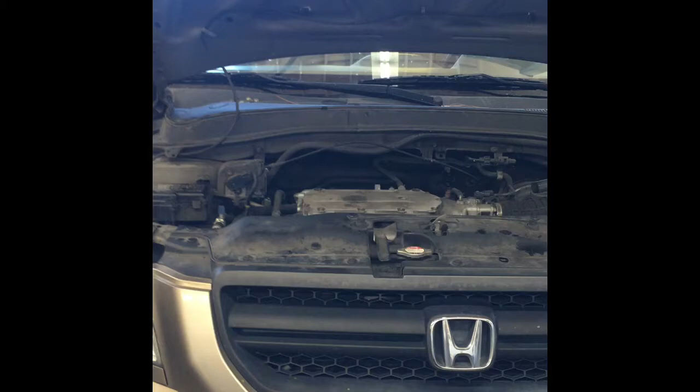2005 Honda Pilot. Valves need to be adjusted. I'm Brian Eslick from How To Automotive, and I'm going to walk you through that process.

To get started, we're just going to remove our upper engine cover. You may notice in the video that a few things are disconnected, but that's because I'm doing a previous repair, so I'll tell you step by step what you need to do.

After you get the engine cover off, go ahead and take the air box and inlet tube off. Unbolt it here, remove the screws holding that on, then there's a squeeze clamp, pull the hose out and set it aside. We need to get this upper plenum off so we can get to the valve covers and remove them.

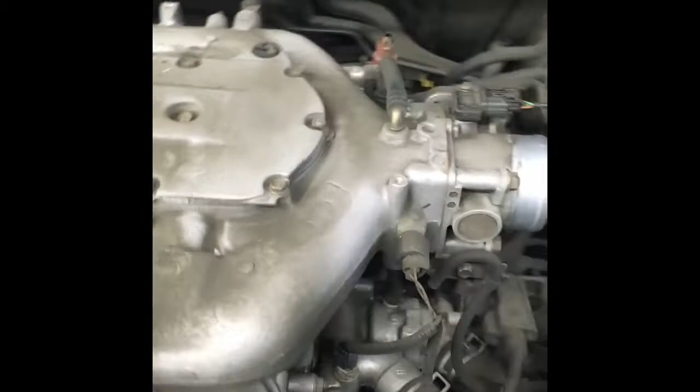What I like to do is take the throttle body off. I'll take off the four bolts holding the throttle body on, and I'll leave as many of the hoses and electrical connectors connected as I can, then just slide it off and set it aside.

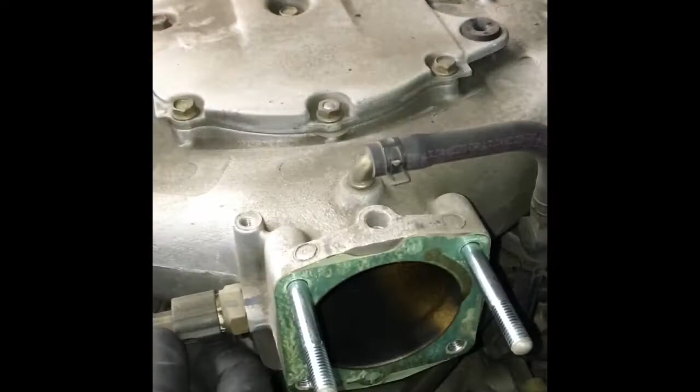Now that you've got your throttle body tucked aside, go ahead and disconnect your temp sensor. Take the two 10mm bolts out on the purge valve and unhook the hose there; you don't even need to unplug the electrical connector, just let it hang down. Take off your vacuum booster line, and on the opposite side of the plenum, take this hose off at the bottom and leave it hooked up on the top.

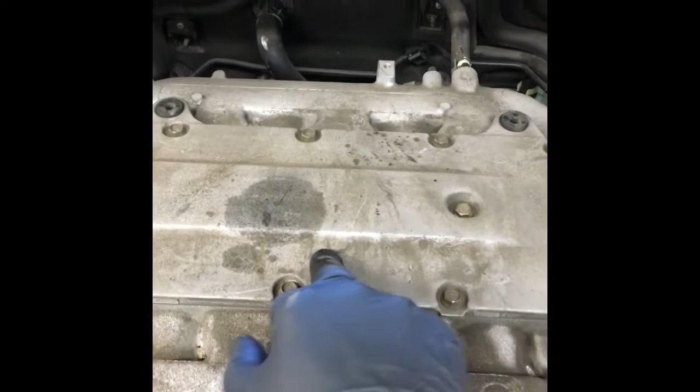Now that you've got all that unplugged and disconnected, take out the 12 bolts and a couple of nuts on this top cover, and take the top cover off.

Now take out the 7 bolts and 2 nuts that are here. Don't take out the 2 10mm bolts here, leave those alone. After removing the bolts, you can just lift the plenum off and set it aside.

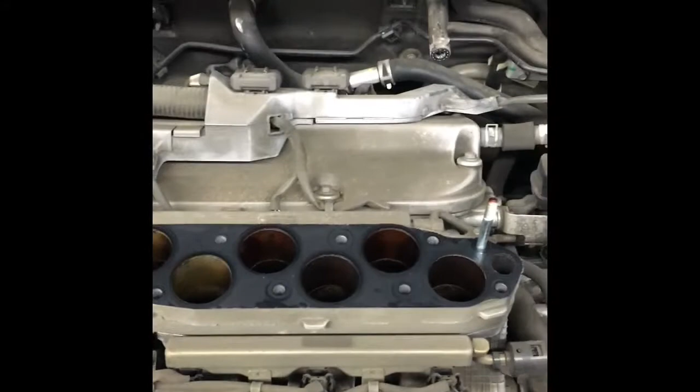Right now I'm just going to leave it on, but what I'm going to do is take rags and stuff them in here to cover all the ports, so that while we're working on the rest of the job, that helps prevent anything from falling in there and causing a future problem. Go ahead and do that.

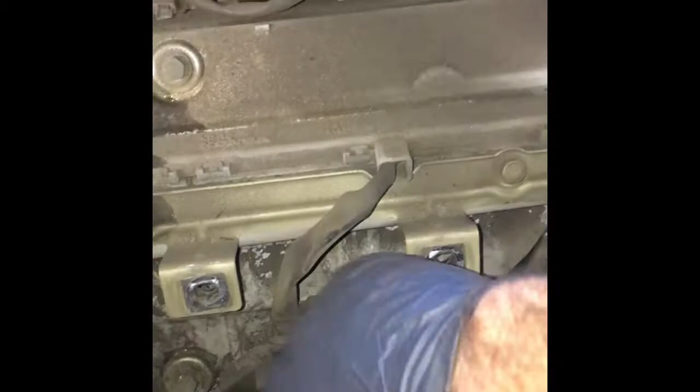Then unplug the ignition coils, take the Allen bolts out, and take the coils out on the front and back valve covers. Go ahead and do that.

Also go ahead and take out the 10mm bolts that hold the bracket for the wire loom down to the top of the valve cover, and remove that. There's going to be a couple of those on the back valve cover too. What I like to do is just feel for them because it's kind of a blind thing, and there are a couple of them behind here. Take those off too.

After getting all the coils out and the loom unbolted on front and rear, I'm going to put our focus back toward the front valve cover first.

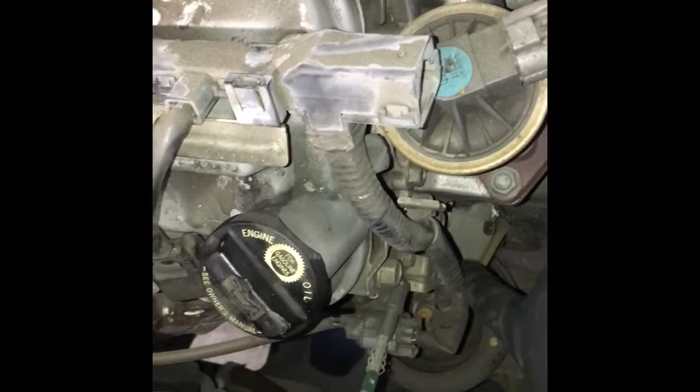Go ahead and get this one off. Right here on the driver's side of the car, next to the EGR valve, there are 2 electrical connectors, one for the oxygen sensor and one for the motor mount. Disconnect those, and right here is where the wire loom is attached to a bracket. We're going to pop that out, and once we do that, this whole wire loom will flip out of the way. Now we've got everything unplugged.

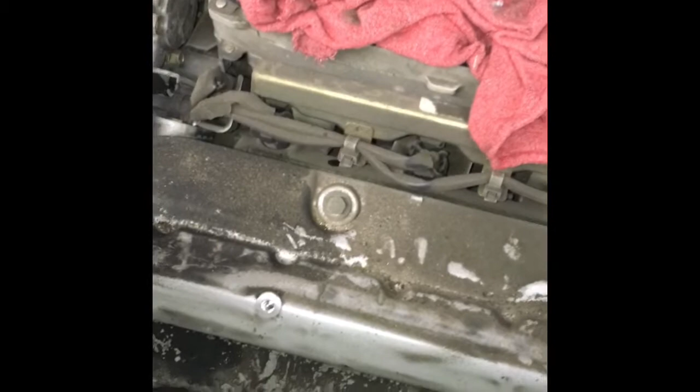You can just fold the wiring harness over and set it aside like that. Now we can go ahead and pull our dipstick out on the front valve cover and set that aside, then start removing the 10mm bolts around the valve cover.

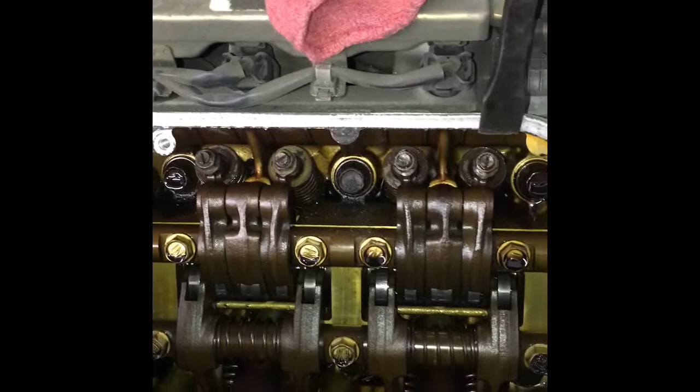After removing the 5 bolts, you may have to use a little pry bar right here in the corner and just pry it up lightly, since it can glue itself to the cylinder head a bit, then just lift it off.

So now the back valve cover is a little bit more difficult. We already unbolted the 2 bolts that actually hold it on—there's only one right here and one here in the corner—and got our coils all unplugged.

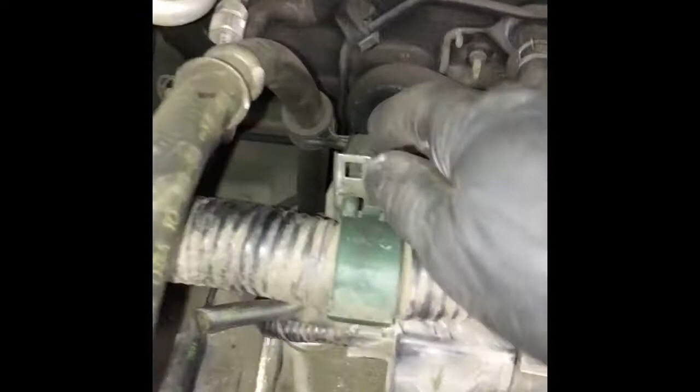So what we need to do is unplug the injectors here, unplug the 3 injector wire looms, and then over here on the side you need to pop this little tab and pull the wire loom off of its little perch. Also there's a little perch here where this green one is, and you'll lift that one off too. We're going to get slack and lift it up as high as we can. Now that we got the wire loom off the perch and got some play in it, and your injectors disconnected, you can pull the wiring harness back.

You can see the power steering hose that goes along, and there's a bracket attached to it—you need to take that 10mm off. Also here on the driver's side, you need to take this vent line off.

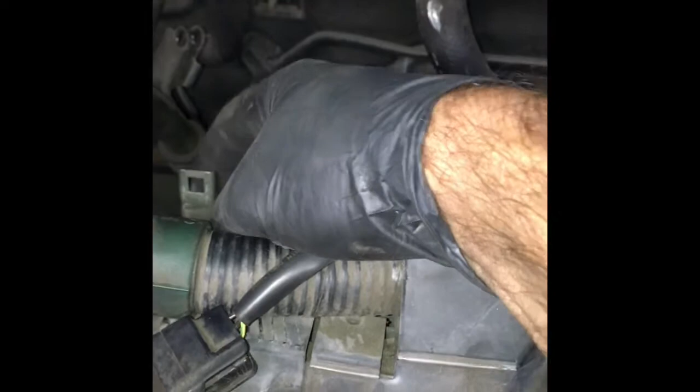Also on the back timing cover, if you pull the wire loom out of the little groove it's in, that gives you a little more slack too. Because we're going to unbolt it next and lift it up as high as we can and slide it out from underneath the wiring harness, I've found that if you take this little 10mm bolt right behind this little ear and take this bracket off, it reduces the risk of snagging the wiring harness and eases it coming out of the car. So take that off and set it aside too.

There's one more of these green mounts right here on the driver's side. If you pop it off the earlobe down below, now you can really maneuver the wiring harness out of the way. Now you can get to your 5 bolts that hold the valve cover on—go ahead and remove those and pop the valve cover up.

I was able to lift the wiring harness up just high enough to kind of snake the old valve cover out, just like that. Now that I got the valve cover off, I see there's a 12mm bolt holding this little bracket on, and if you were to take that out, you could probably get even more lift out of the wiring harness.

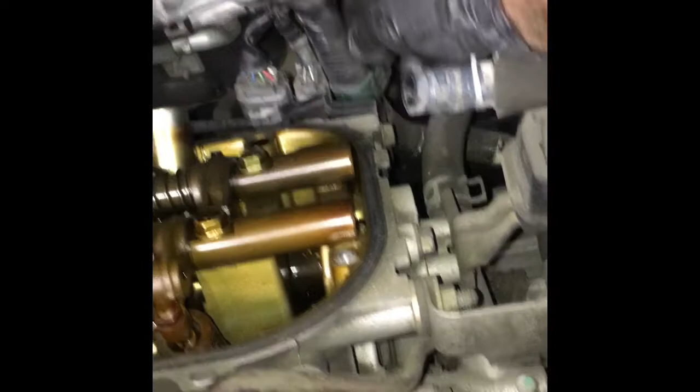Okay, now that we got the valve covers off, we're ready to proceed to adjust the valves on the car. The first step is to get the car at top dead center, cylinder number 1. To do that, you want a setup like this on your crank pulley—you're going to need a 19mm socket.

In this case, it's a 19mm, and an extension so you can reach it. There was a shield here, I took it down.

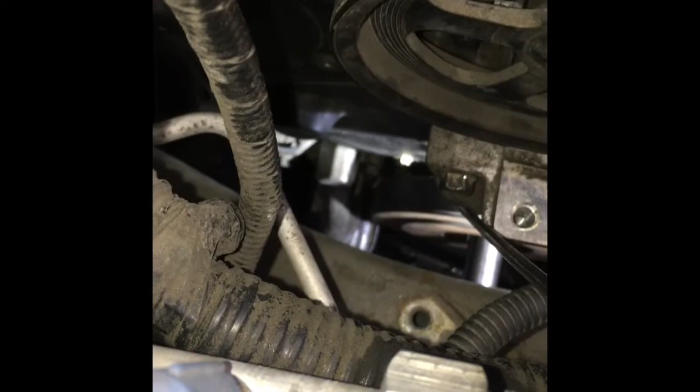You're going to rotate your engine counterclockwise, and there are 2 alignment marks you need to line up to know when you're at top dead center. On the crank pulley, on the inside lip, there's going to be a little notch—it's a little hard to see, but my screwdriver is touching it. Above it is a little triangle on the cover. There are like 4 notches in a row, one red, but you want the last notch, marked white, furthest to your left on the pulley. You want the tip of that white notch and the tip of the triangle on the cover to line up.

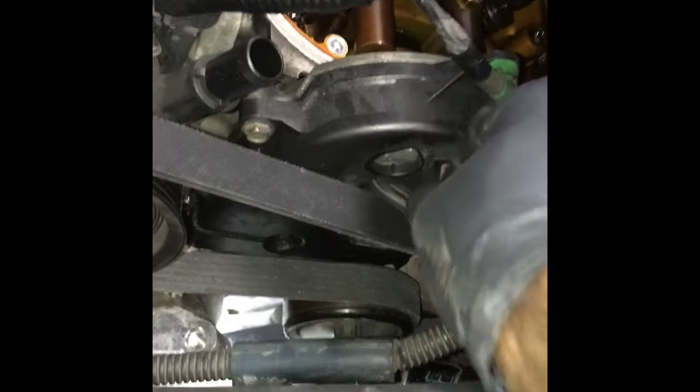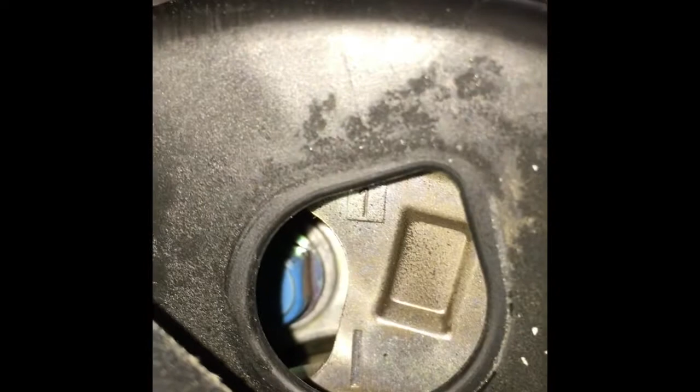Once you get that, to verify you're on top dead center and not 180 degrees out, you're going to take this little plug—it's on the cylinder timing cover—and remove it out of your way. Inside that plug, you'll see a number 1, and there's a little alignment hash mark that should align.

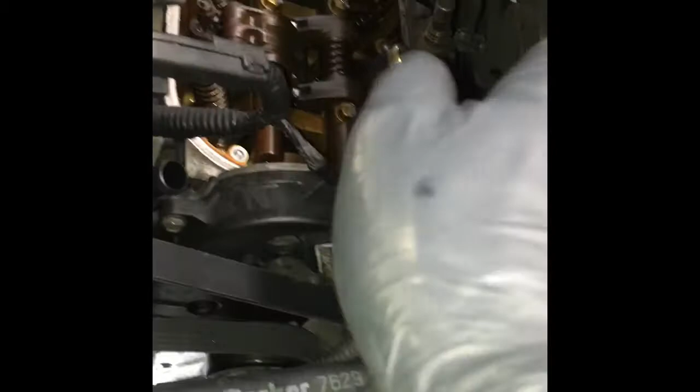And that's the cover closest to the radiator. So if you see the hash mark lines there, and the number 1 in the wheel here on the cam, and the alignment mark below lines up, you know you're at top dead center, number 1 cylinder.

So before we actually make our first adjustment, we want to make sure that the engine is completely cold, below 100 degrees Fahrenheit, the cylinder heads themselves.

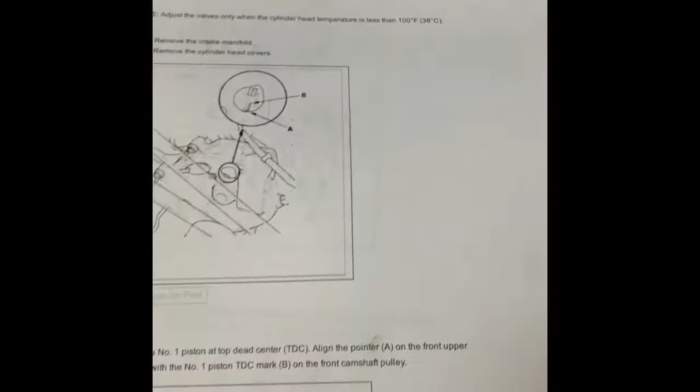So now we're gonna follow the factory process on how to adjust the valves, and I got this information courtesy of ALLDATA. If you guys don't have ALLDATA in your shop, it's a good tool to have. It's a great source of information.

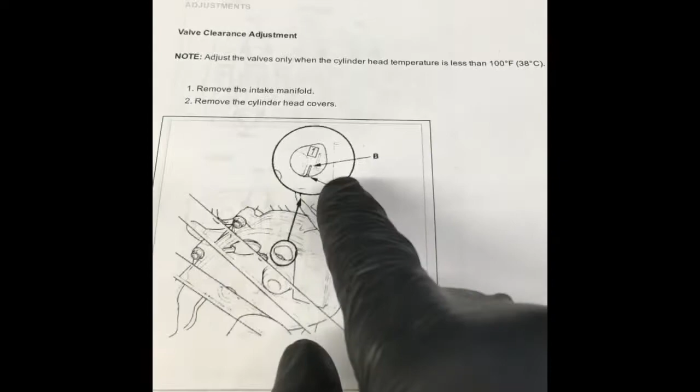So now that we got it lined up on number 1, like it says here in the diagram, we're going to adjust intake and exhaust valves on cylinder number 1, which is going to be the furthest one in here in the back. So you're going to have to maneuver the wiring harness in and out.

So when you start adjusting these, you need to know which one's the intake and which one's the exhaust valves. Easiest way to tell is the valves that are closest to the exhaust manifold itself are going to be the exhaust valves, and the valves closest to the intake runner are going to be the intake valves.

The feeler gauges I like to use is what they call a go or no go, meaning this is the exact size you want at the very tip, and if you slide it in, it gets thicker. So if you're adjusting your valve and you slide it in and it fits nice and smooth, and then you get to the thicker part and it will not go, that means that's pretty much the proper adjustment, which helps you gauge it.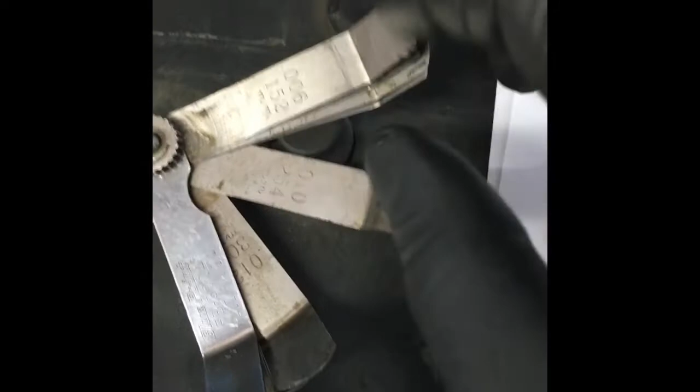I also like to use a combination of the straight ones and the ones with the little 45-degree bends, because some of them are kind of difficult to get to, so it's best to have a combination of different ones. Some have clear shots to get in there and are really easy to check, and some you have to kind of angle them.

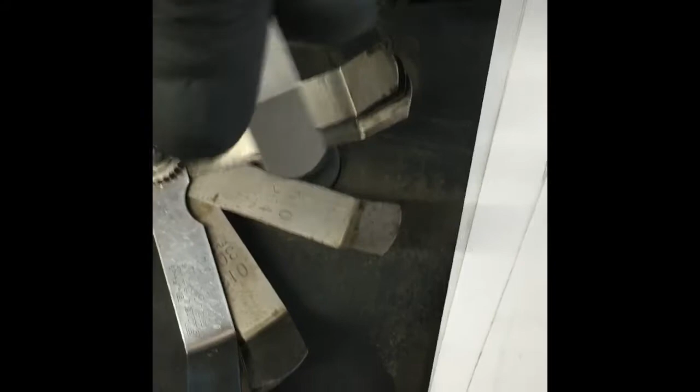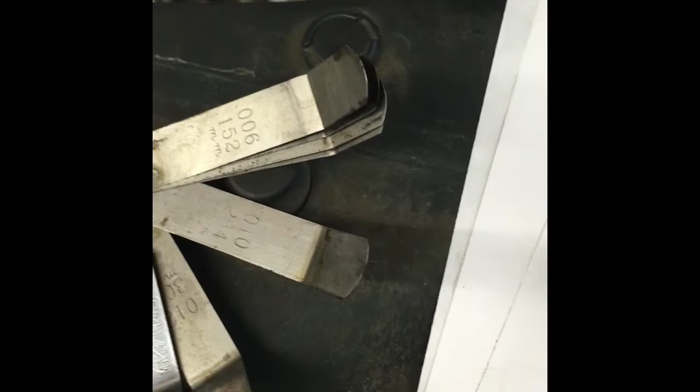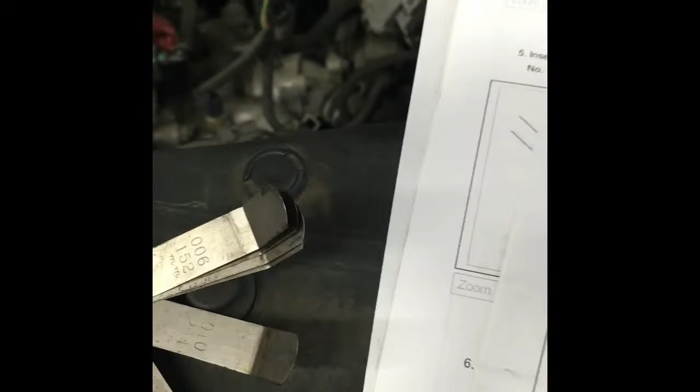Now, the hard part to explain on valve adjusting is it's done by feel. The best way I can tell you is once you get this slid underneath the tip of the feeler gauge, slid underneath the valve in the rocker, you want to feel a drag. It's kind of like if you take the tip of it and pinch it, and then try to pull it out of your fingers. That's kind of the feel you want when you're adjusting.

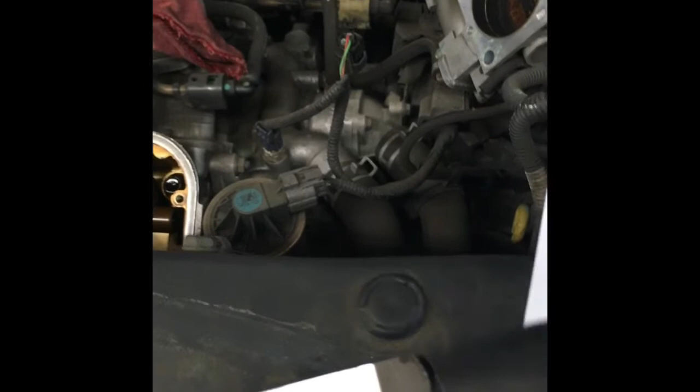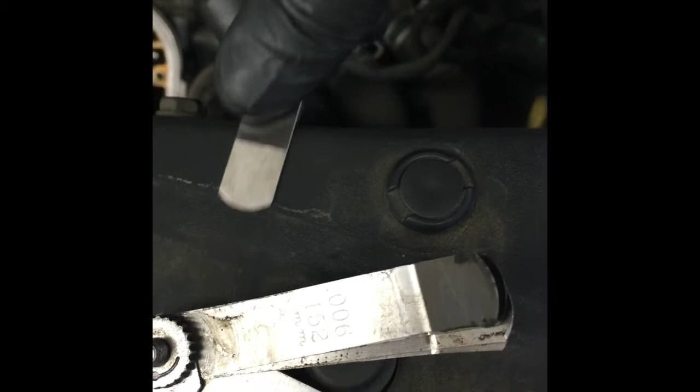Now you'll know if it's too tight. The too tight is easy because the feeler gauge absolutely will not slide in. It's just too tight and it won't go in. But too loose is a different thing. So when you put your gauge under, you want it as flat as you can be, because if you have any angles like this, it can give you a false reading, and you can have the valves too loose.

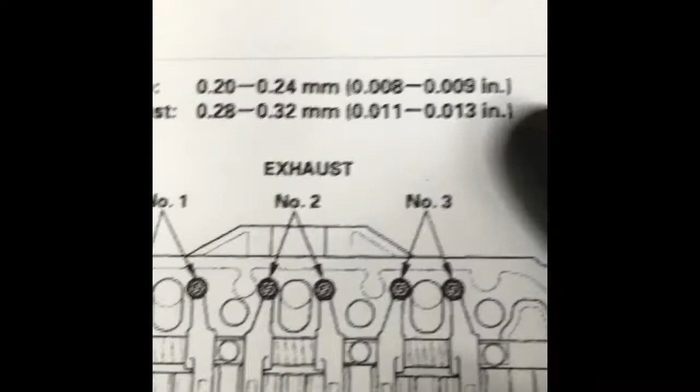Okay, so our spec for the intake, in millimeters, is 0.20 millimeters minimum and a maximum of 0.24 millimeters. Or if you like to read them in inches, it's 0.008 inches to 0.009 inches. So you have a little bit of play, a variance of how thick or loose you can get them. If you're going to err, err on the loose side — if too tight, the valves will burn.

So now we're going to get started.

Now that this cylinder head is lined up to number 1, we're going to adjust the intakes to the specs here you see, and then after that we'll adjust the exhaust on the same cylinder, and then we're going to rotate the engine.

So I got my feeler gauge with the proper spec, and I got it underneath cylinder number 1 here, and as you can see how easily I can move it around. That indicates that the valve is too loose.

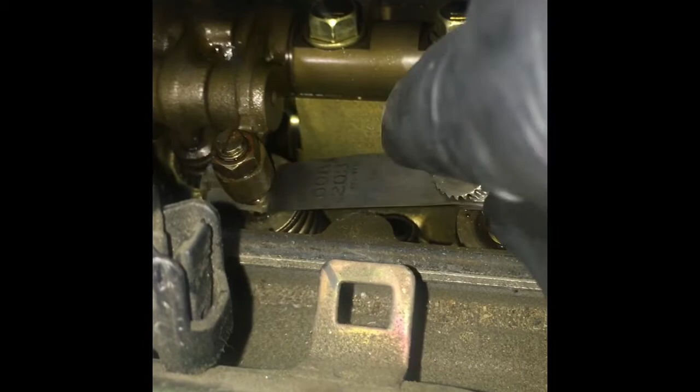So we're going to loosen the 10mm nut here, and then screw the slotted screw inwards until this has a light drag. If you have room, you can use a tool like this.

It has a wrench and a socket and a screwdriver kind of built into one. So you can slide it over it like that, and then you can use the handle to crack the nut free, and then you can use the screwdriver part here to loosen or tighten your valve.

If you don't have that, a good old-fashioned wrench and flathead screwdriver works just fine.

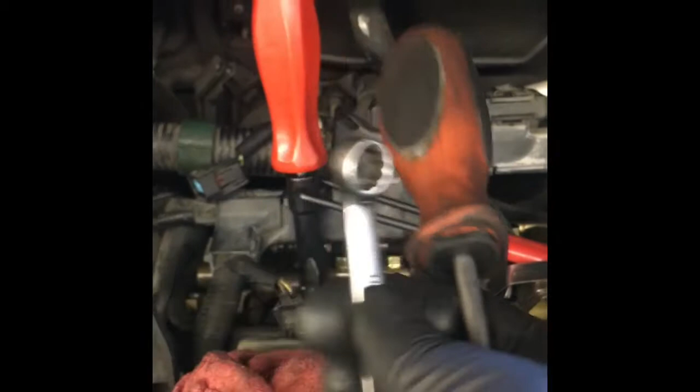So what you're going to do is loosen it, adjust it to where the feeler gauge has the drag, and then you're going to snug it up with this.

And then what you're going to do is torque it down with a torque wrench to 14 foot-pounds, the lock nut to 14 foot-pounds.

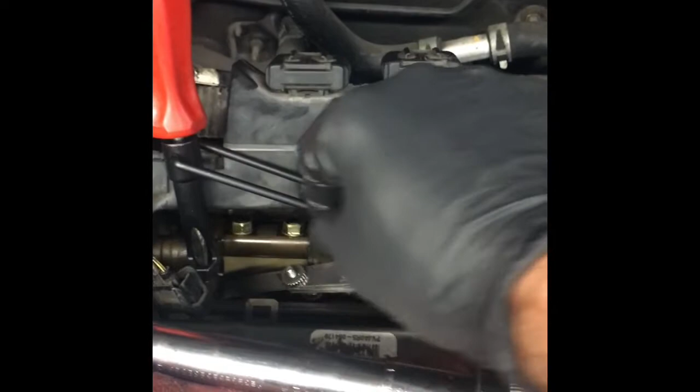And then you're going to recheck it, because sometimes when you tighten them up, things move a little bit and the adjustment will go out. So you may have to loosen this up, tighten it, do this several times until you're confident that everything feels like it's sliding back and forth the way it's supposed to.

So you're going to feel that drag.

So after adjusting both valves on cylinder number 1 on the intake side, now you got to get back here and do the valves on the exhaust.

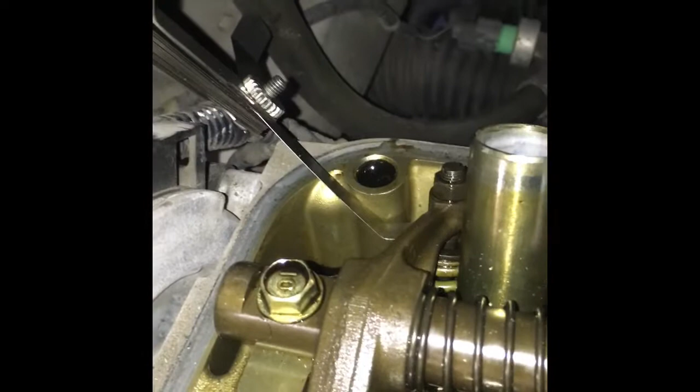This one is tight, so the exhaust valves are tight on this car.

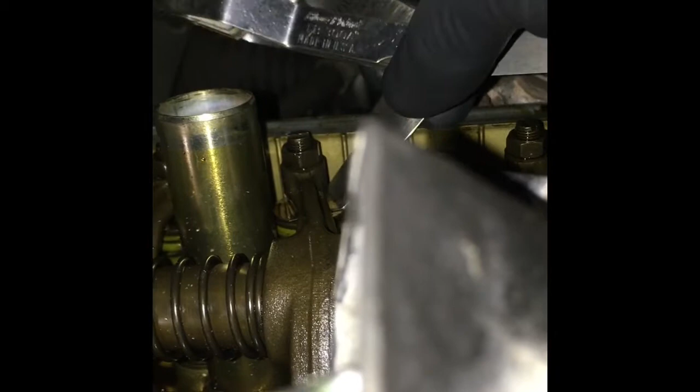So when you're adjusting these, you try not to twist them in any way. You want them as level as you can be, and you want to feel that drag.

So this one's a little on the tight side. I can barely move it at all. So I'm going to loosen it just a hair, and then I'll tighten the jam nut on top here, and then I'll recheck.

And after I final torque down, you recheck again, because I'm finding that when you tighten the nut, it tends to tighten the valve up a little bit too.

So sometimes you'll have to back it off where it's actually a little loose. The feeler gauge is a little loose, but when you tighten the nut, it tightens it up a little bit. So you kind of have to play with it back and forth until you find that magic way it feels.

You may have to do this several times on each valve. There's 2 valves per intake and 2 valves per exhaust. So adjust both intake and exhaust on number 1, and then after you get that done.

I'm going to show you how to rotate the engine to the next cylinder that you're going to adjust.

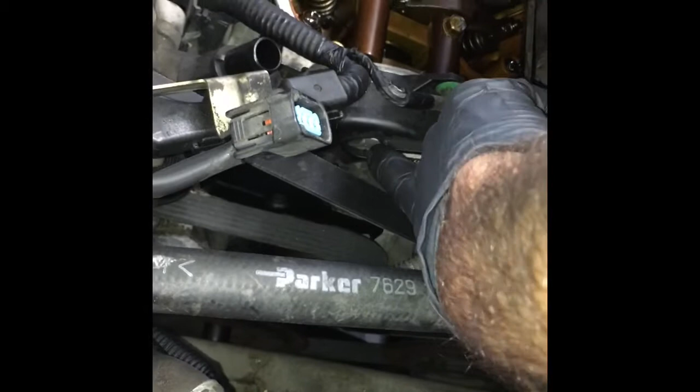So our next step after you got your first cylinder adjusted is rotate the engine clockwise until you see the number 4. So you'll rotate the engine clockwise, and then when the mark lines up here again, and it has the number 4, the inside here is the next cylinder you're going to adjust.

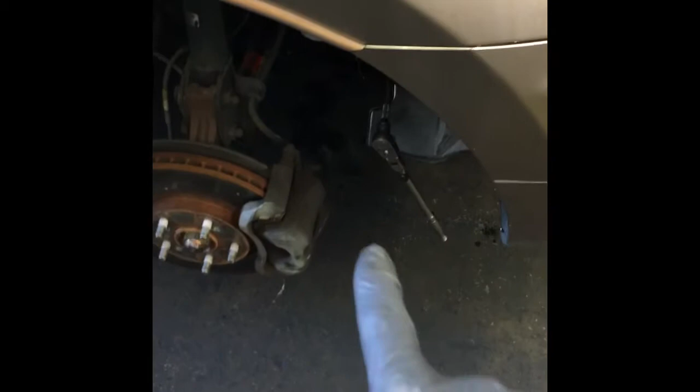So it'll look just like that. You'll see the number 4 and the mark will line up. The way I did it was I rotated the crank, and then I had a partner help me, and he watched up here while I rotated it clockwise really slow until the cam mark lines up.

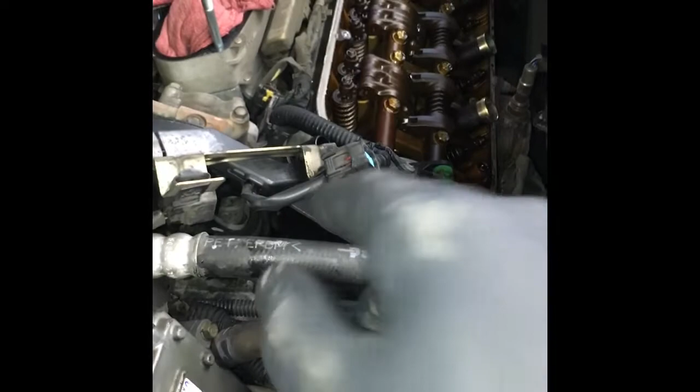So you're going to adjust your intake and your exhaust here, just like you did the one before. And then after that, I'll walk you through the next step.

So after adjusting the number 4 intake and exhaust valves, I'm finding that the intakes were loose and the exhausts were tight on mine. You may find the same as yours.

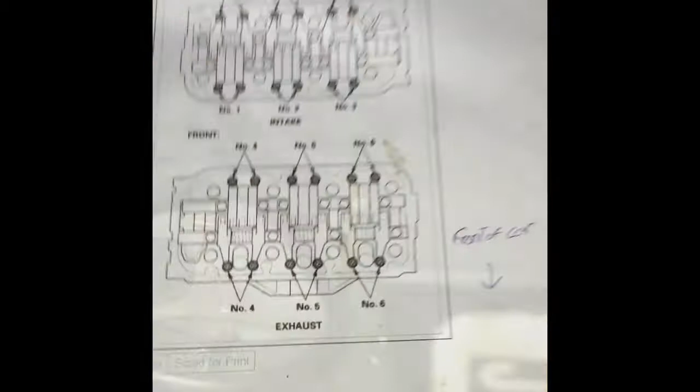So the next step is to rotate the engine clockwise again until in the wheel here it's lined up with the hash again, and number 2 cylinder will show. So now we'll refer back to our diagram. Cylinder number 2 is going to be the one in the middle here.

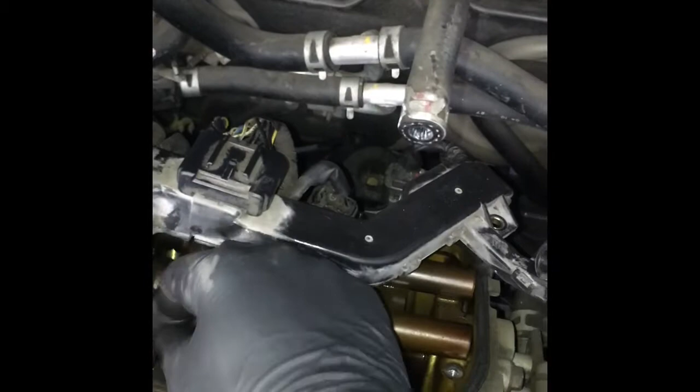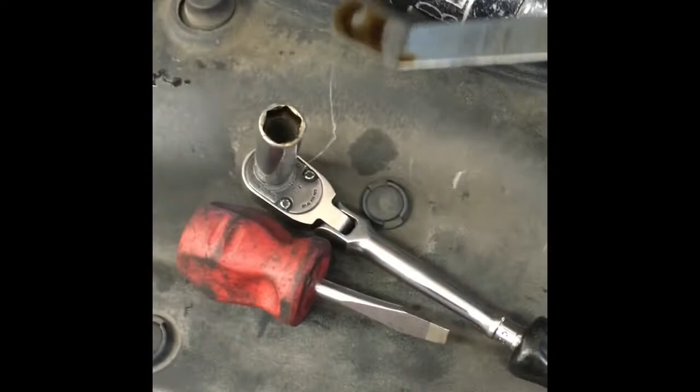So you'll adjust the intake and exhaust and check those. You always check them, you don't just assume they're loose or tight. If they're snug with the feeler gauge, you don't have to adjust them. Just use your feeler gauge and feel them out, and if they're loose or tight, make your adjustments accordingly. I'm finding that my flashlight, the feeler gauge with the little 45, a flat blade screwdriver shorty, and a ratchet like this has been working out the best so far, the easiest to get in there.

So now that you've got cylinder number 2 adjusted, rotate the engine clockwise again until you see number 5 in the window. So now we need to adjust cylinder number 5, which is going to be the middle one on the front cylinder head. We'll adjust the intakes and exhaust valves, or check them.

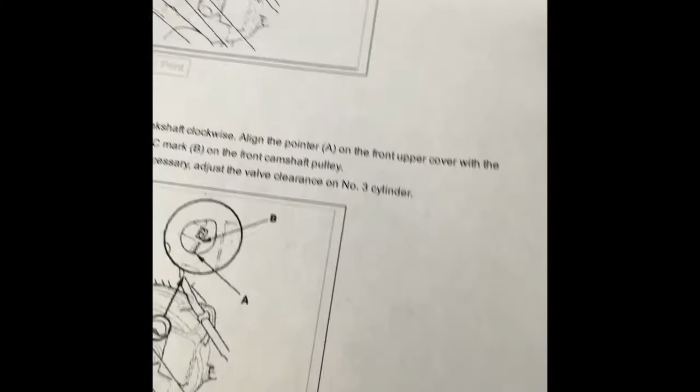After adjusting number 5, rotate the engine clockwise until you see number 3 line up in the wheel on the cam. Now we're going to adjust cylinder number 3, which is the one on the back cylinder head closest to the driver, right over here. So we're going to adjust our intake and exhaust.

After adjusting cylinder number 3, rotate the engine clockwise until you see cylinder number 6 line up in the cam wheel. Number 6 cylinder is going to be the one closest to the radiator on the driver's side, so you'll adjust your intake and your exhaust valves. It'll be right here, so go ahead and adjust those.

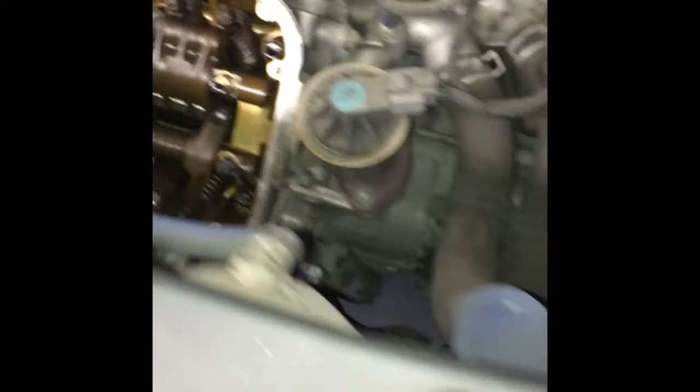That's after adjusting number 6 — that's your last cylinder to do. Now all you need to do is clean up your mating surfaces on the cylinder heads, and put your new gaskets and tube seals in your valve covers.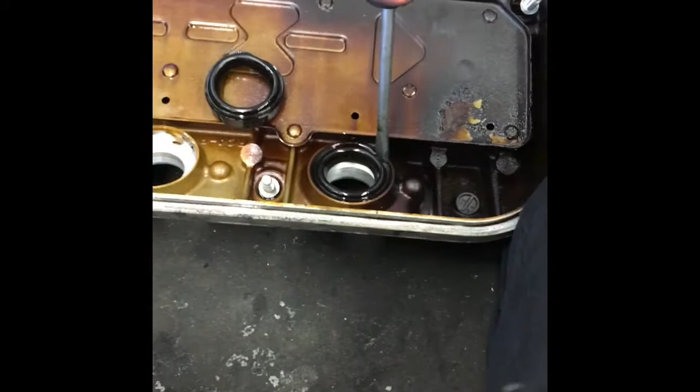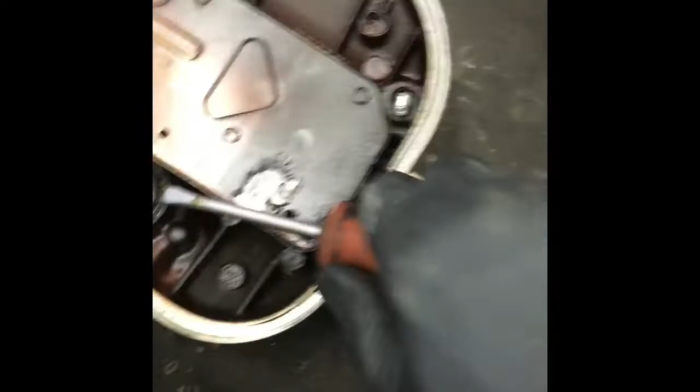So now I'm prepping my valve covers. I've pulled out the old gasket, and I took a flat blade screwdriver and hammered it in between the seal, then pulled it and pried it up and popped it out like that. So take all the seals out and then put your new seals in.

When you get your new seal, you put it in like so, and you'll just drive it in with a hammer until it's flush.

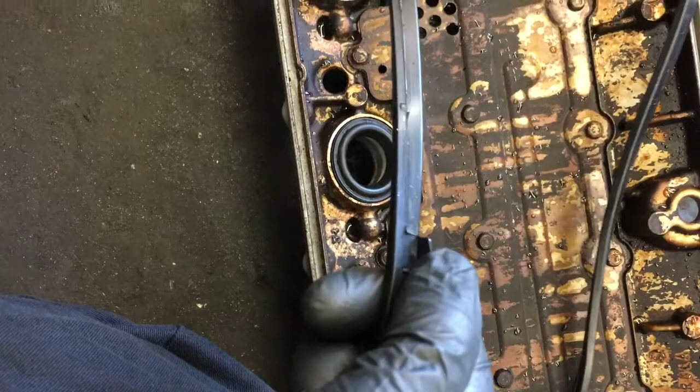So now that we've driven our tube seals back into place, we need to put our gasket on. You want to look at the new gasket, make sure this points upwards towards you, and then they have these little notches. You'll line it up with the notch and push it in, then feed your gasket around. If you get around to this side and the notch doesn't line up here, that means the gasket's 180 out and you have to flip it around. So go ahead and put your gasket on and feed it around.

After you get your valve cover, gasket, and tube seal all set up, now you want to change over the grommets that go on the bolts. The best way to do it is just put it in a vise and kind of hammer these out with a brass hammer, then put your new grommet on. If you don't do that, it'll leak — oil will leak through the bolt holes where they used to ride.

So we're going to change those out, tackling the easy one first and putting the front one on first. After cleaning up the mating surfaces, just take your valve cover — you don't need any silicone or anything like that — put it on over the tube seals, give it a push down, and then you can start all your bolts around and tighten it up.

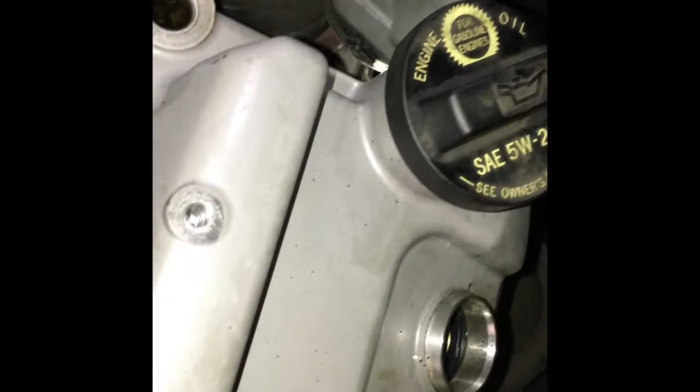A little tip is after you get your valve cover in place, you can take your mirror and run it on the edge to double check that the gasket didn't fall off in the process of changing it. This one held on pretty tight, and it's pretty snug in the actual gasket, so you probably don't have to worry about it. But just in case, I like to check with the mirror to make sure the gasket's in there.

After you get the bolts all bolted up, torque it down in a pattern, like 1, 2, 3, 4, 5, kind of inside out. Then go ahead and put your coils in and bolt those in. Now that your coils are bolted up on the front cover, we can flip our wiring harness back down, put our bolts back in, and plug everything back in that we unplugged.

Put your dipstick back in. Okay, so now it's time to put the rear valve cover back on. The best way to do this is get somebody to help you and have them hold the wiring harness up while you take the valve cover, making sure the nipple is pointing back towards that, so you don't put it in backwards. You'll figure it out real quick if you do. So you want to slide it in like this, rotate it in, and put it back into place while somebody holds the wiring harness out of your way.

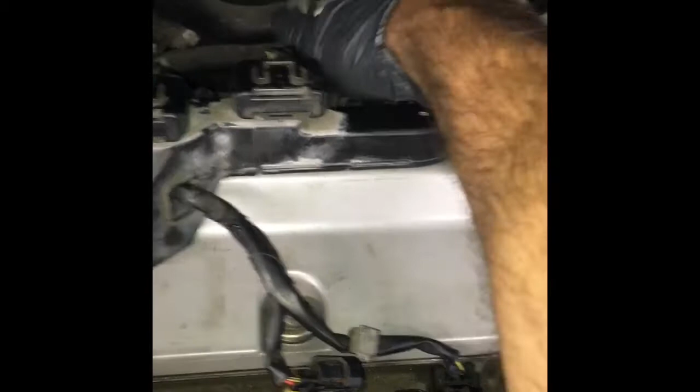Once you get it in there, go ahead and bolt it up and put your coils in and bolt that up. After getting your valve cover in, bolted in, your coils bolted up and plugged in, now I like to start from this side of the valve cover back. Anything you touched or unplugged on this side, plug it back in, and remount your mounting bolts for your bracket. You also have to put this ear that you took off back on, and then remount that. Then the bracket for the power steering hose, go ahead and remount that, and make sure you plug in your injectors. I'm gonna go ahead and do that right now.

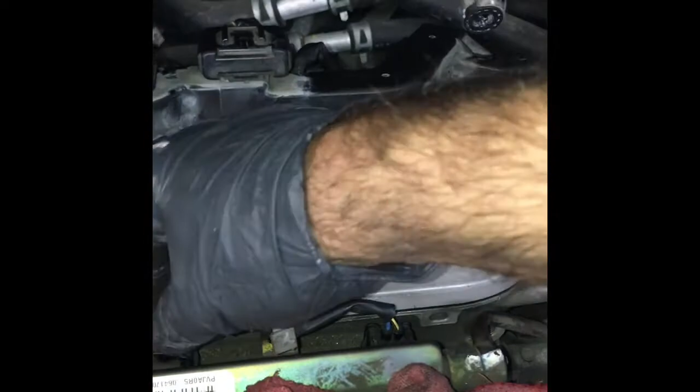So after you get all that done, then we're going to change out our gaskets for the plenum here and put our plenum back on.

Before I change out my gaskets, I'm going to take my flashlight and walk my way around the engine, anywhere I've touched, and double check everything is plugged in. You want to make sure all the wire looms are tucked back into the cover here, and that everything is plugged in everywhere. Then if that's all good, you can change your gaskets and just take the plenum and set it back on top.

After getting the plenum on, put your bolts in and run them down, torquing them at 16 foot-pounds, starting from the middle and working your way out in a crisscross pattern. Now you can change out the gasket here and put the cap back on, torquing those bolts down to 8 foot-pounds. Now that that's all torqued down, go ahead and reinstall all the hoses and your throttle body, and tighten that up.

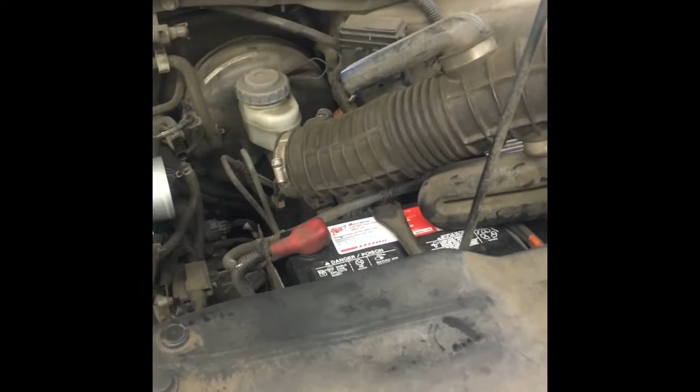Now that everything's bolted back up, go ahead and put your air cleaner assembly on, and put your top engine cover on. After getting all the covers back on, fire her off and give her a good test drive.

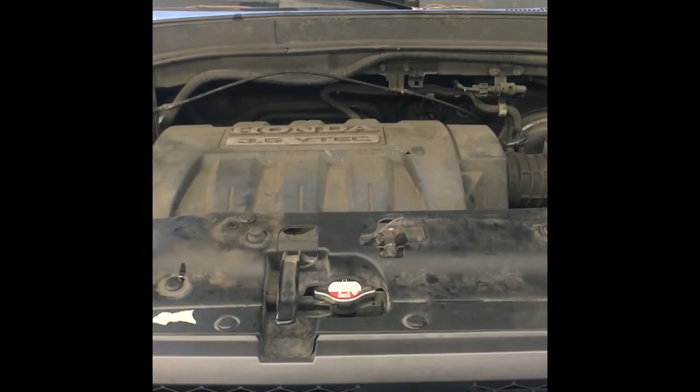And that completes the how to adjust valves on a 2005 Honda Pilot with a 3.5 liter engine.